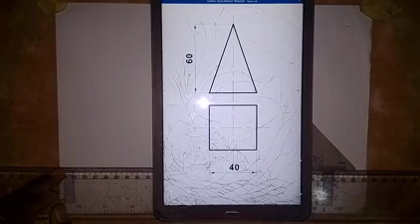Here we are going to be looking at the surface development of a square pyramid. How to make the surface development of a square pyramid, as we have done that of the square prism. We did that of the cylinder. So we want to look at how we can do that of the square pyramid.

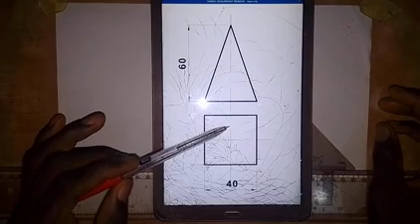As you can see on the screen, this is the front view of a square pyramid, and this is the top view. The condition for the surface development, I'm going to be explaining it as we go on, but what we have to do first is to reproduce these given views on the paper. Then we go on and make the surface development.

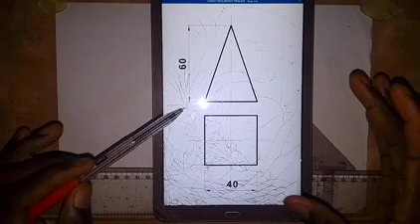Actually this is a complete square pyramid. It is not truncated; we will still look at the truncated one, but this one is a complete square pyramid. Now let's go and replicate what we are given, but before that, the side of the square base of the pyramid is 40 millimeters, while the height of the pyramid is 60 millimeters. So first of all, replicate the given views as I said.

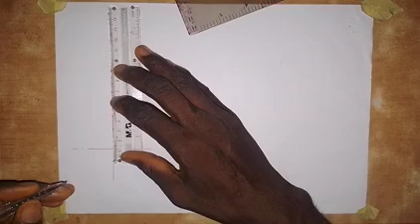So we have to draw a vertical center line. Then we draw a horizontal center line. Based on how the square base is positioned, we take 20 millimeters from the point where the two lines intersect: 20 millimeters to the left side and 20 millimeters to the right side. Then we take 20 millimeters down by setting the ruler like this, and 20 millimeters up.

Next we bring the T-square to this point and draw horizontal lines to the left and to the right. Then with the set square on the T-square, we draw this vertical line as a thick line, and also this vertical line as a thick line. Then make this horizontal line a thick line, and also this horizontal line a thick line.

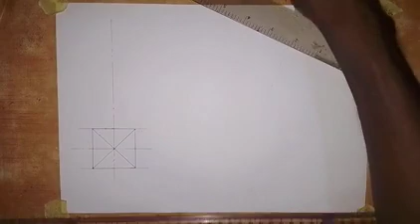Looking at the pyramid from top down, we connect these two diagonals together with a thick line, and we also connect these together with a thick line. The next thing is to come up a little bit and draw a horizontal line. Before we continue, let's number the points. This is point 1, this is point 2, this is point 3, and this is point 4.

With the set square, we extend this vertical line to touch the horizontal line, and we also extend this one. On this vertical line, from this point, we take a measurement of 60 millimeters. Now we connect this point together; that's going to be the apex of the pyramid. So we connect this point, and we also connect this point like this.

Then we have this point: this is point 1 prime, 2 prime, and this is point 3 prime, 4 prime. Let's call this point O. Then we make this line a thick line, and also this line a thick line, and this baseline a thick line like this. So these are the given views. The next thing we are going to do is go for the surface development.

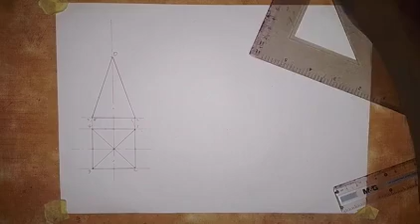But before we make the surface development, I want you to know something very important. Because of the way this pyramid is positioned with its square base in this form, this line O1 is not a true length of the pyramid. So I write it here: not true length, TL. So we have to find the true length.

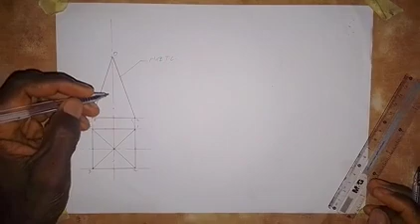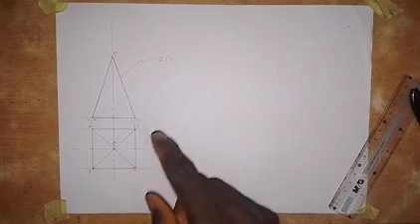So how can we find the true length? Let me call this point O prime. What we want to do is to bring this corner onto this horizontal line. To get the true length, we have to bring this corner, or this corner, any one of them, onto this horizontal line. Then we can bring out the true length on this view here. So this is what we are going to do. Just follow my instructions.

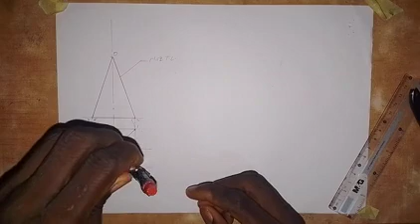So put the midpoint of the compass here at point O and extend the pencil point to point 2 here on this corner. Then draw an arc like this to touch the horizontal line. Okay, so from this point where the arc touches the horizontal line, we have to draw a vertical line. So we need to extend this horizontal line at the base a little bit. Then from this point where the arc touches the horizontal center line, draw a vertical line like this to

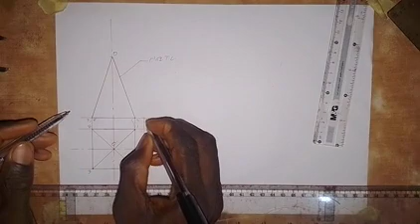touch the horizontal line. Okay, so now let's call this point A, and let's call this point A prime. Okay, now we are going to join this point A on the horizontal together with point O here. So this is what I mean. So it goes like this to the apex of the pyramid.

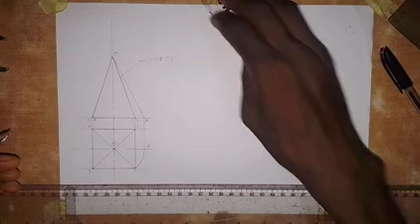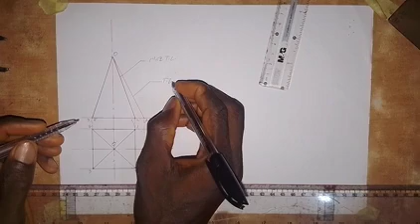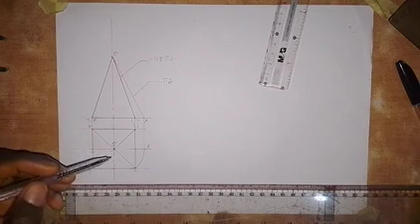So this particular line that we have here, this line OA, is the true length. So we have gotten the true length. If you take the measurement of O2 here or O1 here, it is not equal in length to this line OA. Okay, so OA is the true length. Because of the way the pyramid is positioned and we have its base like this, for you to develop this pyramid, you have to find the true length, and I've shown you how to get the true length.

As I said, put the point of your compass here at this point O, extend to this corner and draw an arc to touch the horizontal center line. Then from here, draw a vertical line, let it touch the horizontal line drawn from the base of the pyramid. Then join that point together with the apex of the pyramid, and that will be the true length.

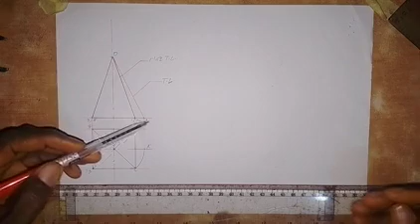All right, now we can go and produce the surface development. The reason why we need to find the true length is for us to make use of this true length to draw the surface development. You cannot use this O1. It will not be correct. It will not be accurate. So what we have to do is to get the true length and make use of that line to draw the surface development. Now, for surface development, let's see how that goes.

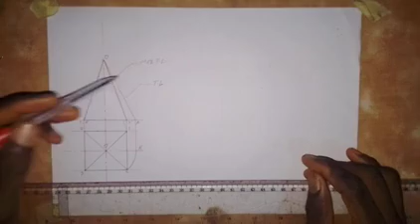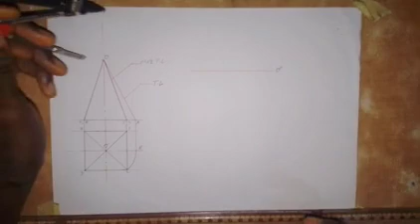Okay, so what we have to do now, just move away. People do make the development with the given view, but for me I do separate it. So I'm separating it like this. Draw a horizontal line like this. Then this point here, I will call it O double prime. Then take the compass, put the midpoint at point O here, and take the true length, that is OA. Then put the midpoint at point O here, and draw an arc like this.

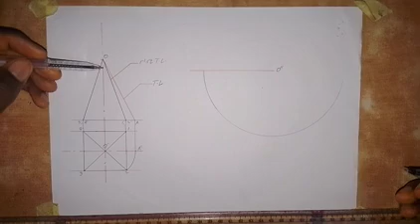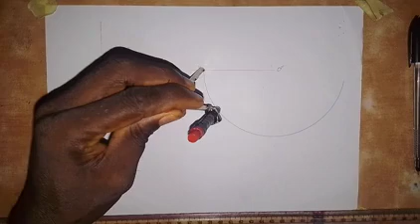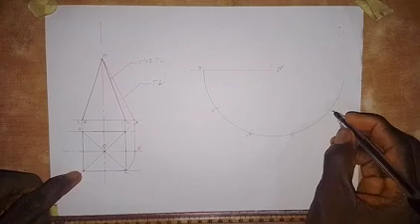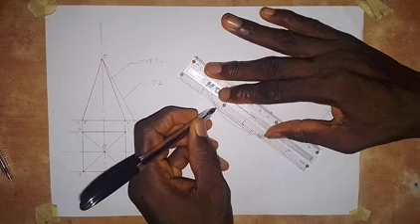Alright, so the next thing that we are going to do is to join these points together with a thick line. So we join 4 and 3 together, and 3 and 2. Then we join 2 and 1 together with a thick line. And we join 1 and 4 together with a thick line.

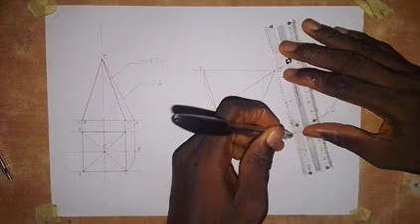And then we join each of these points with point O double prime, which is the apex of the pyramid. So we join this together with O double prime, we also join 1 together with O double prime, and then we join 4 together with O double prime. Alright, so then we make this line a thick line.

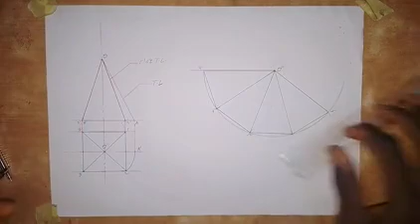Okay, so this is it. This is the surface development of this complete square pyramid. It's as simple as I've done it here. All you have to do is to practice.